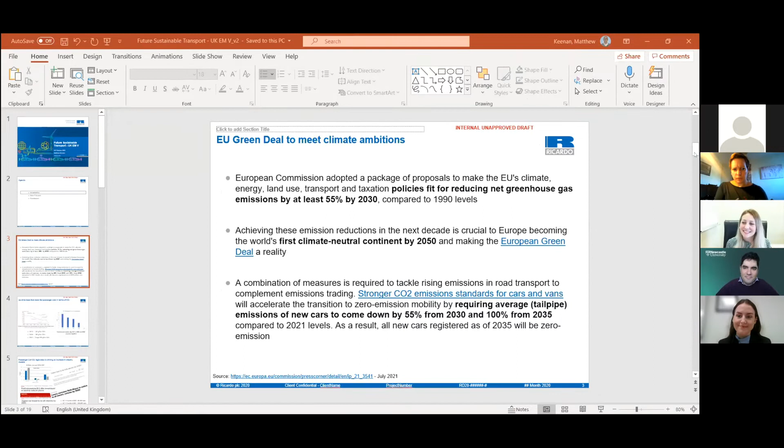So this morning I'll hopefully set the scene for what we at Ricardo think are going to be some of the important challenges in having very good emissions control in our transport sector. The transport sector has been changing significantly over the previous few years, and we really try to see where the main catalytic challenges may lie in terms of different tailpipe species that need controlling, the temperature these systems will need to operate at, and the impact of real world conditions on how emissions control is still necessary, ensuring we have very low tailpipe emissions from our transport sector.

So we've got 3 sections this morning. We'll have an introduction to look at some of the drivers - the European drivers impacting the automotive industry. We'll look at Euro 7 impacts. Later this year the Commission should be publishing their first draft of Euro 7, so it'll be interesting to see how that fits. And finally we'll have some summaries on what we think the future transport system may look like.

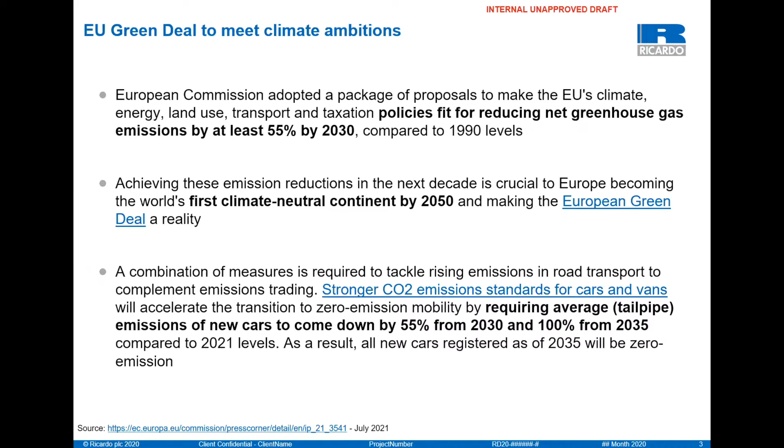The next target we have is this year - meeting 95 grams per kilometre CO2 fleet average for passenger cars. Last year we were at 108 grams per kilometre CO2, so we've got a step change from 108 down to 95 - a reduction of 13 grams per kilometre fleet average from last year to where we need to be by the end of this year. It's quite a steep trajectory from 2019, where unfortunately tailpipe CO2 emissions average had increased in previous years, but over the last year or so we've had a significant step change in these tailpipe CO2 emissions.

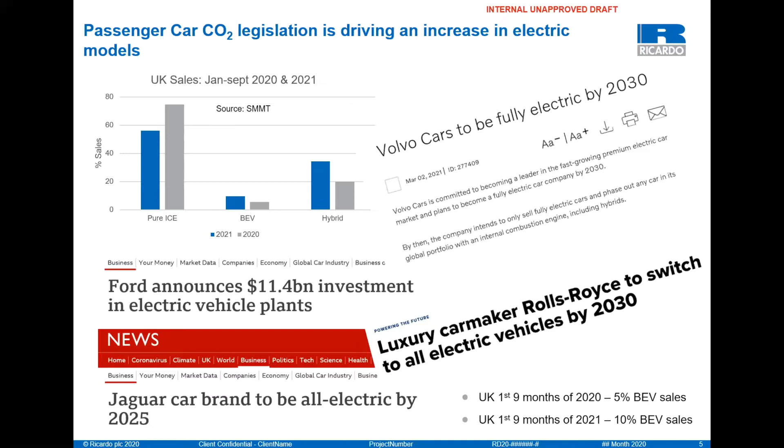Similarly for trucks, there's significant CO2 legislation in place. If we just look at the large Class 8 trucks, they are targeted with a 15% reduction in CO2 at 2025, dropping to a 30% reduction in CO2 at 2030, all relative to the CO2 emissions at 2020. So you really need to have a good understanding of where you are now and how your trucks are performing in terms of CO2 and fuel economy, and then have your plan of how you go from where you are today all the way down towards 2030, with CO2 reduction targets following for different classes of trucks. So the whole arena is now significantly focusing on reducing CO2 from the tailpipe of the vehicles.

Just to complement those CO2 requirements, we are starting to see some interesting technologies applying to the large application sector. This application is being brought into service because of local legislation. Ultra-low emission zones occurring around Europe and around the globe are in some cases superseding what the Commission is looking at in terms of its global CO2 and global emissions legislation.

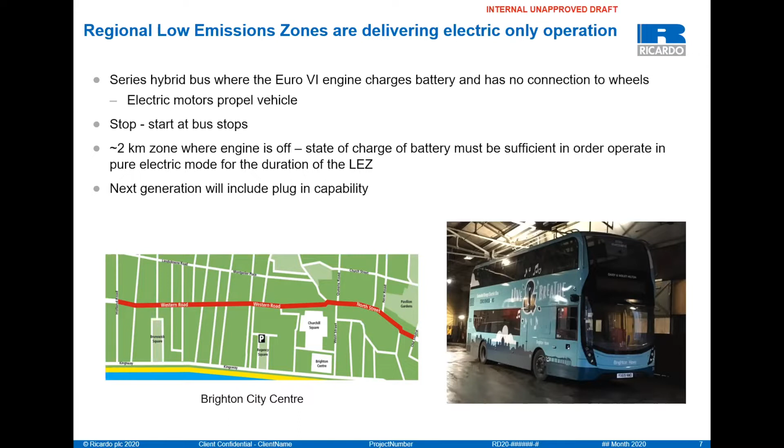Okay, so Euro 7 and beyond. What does this mean for our passenger car technology? What does it mean for our truck technology? And what does it mean for some of our large engine technologies? We'll have a quick walk through how we think this will impact technology.

So Euro 7, not before 2025 from the Commission's view. This is going to be the last emissions legislation, and therefore it needs to incorporate current fuels and future fuels. So this will cross-cut all the different fuels we have now and any new fuels in the future - those new fuels could be hydrogen, they could be ammonia. We'll come on to those a bit later.

Very differently to how we do emissions testing at the moment - where you normally drive a specific cycle with a fixed length and control emissions in that fixed length - this is changing at Euro 7 to allow any trip to be a valid trip, and you have to control your emissions in any trip.

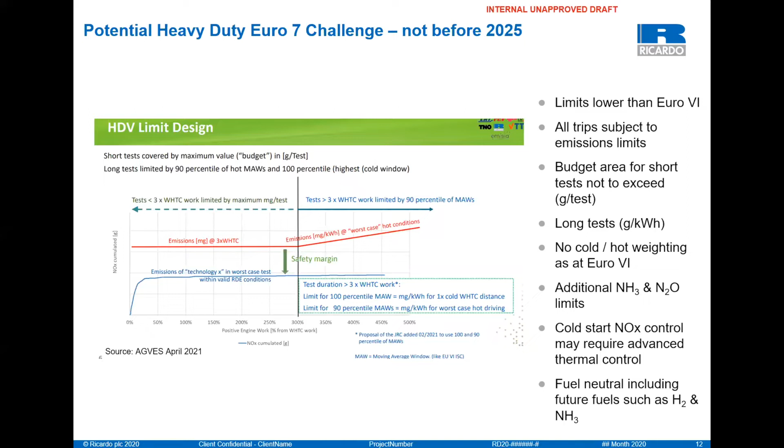This allows us for short tests, long tests. It removes previous weighting of hot and cold testing. So every driving operation needs to be valid, and the emissions in that cycle need to be well controlled. We're going to have additional pollutants to control, ammonia, N2O. And also, as I mentioned before, we will need to be able to meet all these limits and ambient conditions if we're using hydrogen as fuel or if we're using ammonia as a fuel. I think that's quite interesting, the way the heavy duty arena is looking more seriously at hydrogen and ammonia.

So if we look at what a heavy duty after treatment system might look like towards Euro 7, this is 2025 and beyond. Because of the cold start challenge, because every trip is a valid trip where you need to control your emissions, we are probably going to have a very close coupled SCR system. Traditionally in a truck, the after treatment system is one or two meters away, in a box in a relatively cold position on the chassis of the vehicle. We're going to have to put a small SCR system very close to the turbocharger to use the heat from the engine to control the emissions.

So we get this really complicated after treatment system where you have a urea injector, an SCR, an ammonia slip catalyst, which is quite small, so it's only really effective under limited cold start, low load operation. Then we have our more traditional DOC, DPF, SCR, ammonia slip catalyst. So it becomes a really complicated system. But what this allows us is to reach very low tailpipe emissions. For this type of system, for a low load cycle or delivery cycle, which are challenging cycles, we're targeting less than 70 milligrams per kilowatt hour for NOx emissions.

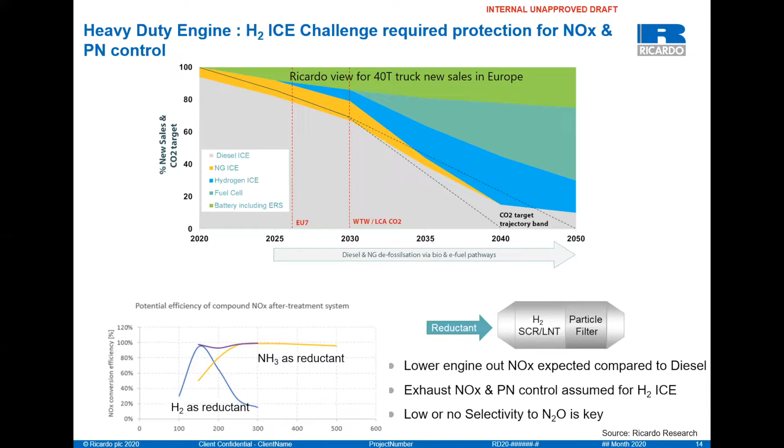Okay, I'm slowly running out of time, so let me just jump to the ammonia engine.

So the ammonia engine is being seriously investigated for marine applications. Studies are starting, demonstrator programs are starting as well. We have an international distribution of ammonia, so we know how to transport it - it's a liquid, we handle it regularly. We've got large production of ammonia globally for fertilizers, so there's potential here to use ammonia as a fuel in some of these very large engines.

Challenges though: you burn ammonia, you will make NOx, you will have ammonia slip, and you can have N2O being formed.

Therefore, you need an SCR catalyst to control the NOx. However, we understand that some SCR catalysts at the moment can make N2O. So you could get into a situation where after your SCR catalyst, you have low NOx, potentially high ammonia, and some N2O.

So we're going to need an ammonia slip catalyst to control the ammonia. We also know that ammonia slip catalysts can form N2O as well. So you could end up having an ammonia engine, which is a carbon-free fuel, but having quite a big greenhouse gas footprint because of the N2O that's being formed.

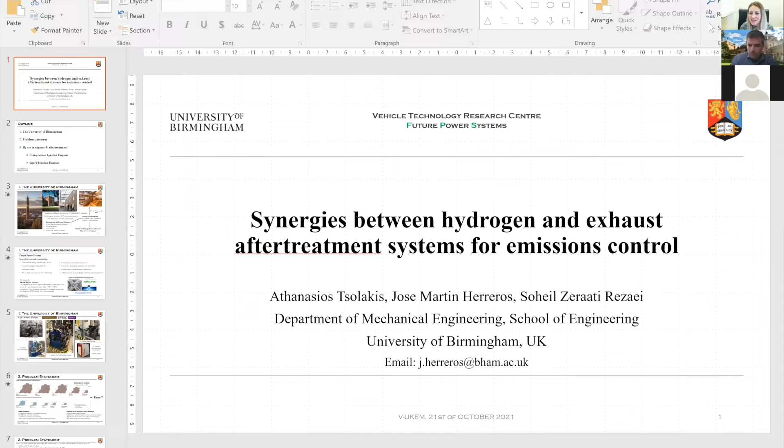The talk today is about synergies between hydrogen and exhaust after treatment system for emission control. We're going to present some of the work that we have been doing in the last 7-8 years at the Future Power System Group with my colleagues Professor Thanos Tsolakis, Dr. Soheil Zeraati Rezaei, and myself, Martin Herreros.

We have divided the presentation into 3 main sections. The first one, very briefly about ourselves, University of Birmingham, and our group. We will also define briefly the problem statement, the challenges we are having with emissions, and what solutions we could have to tackle those challenges. Then, taking the major part of the time, we will present some case studies on the interaction between hydrogen in engines and hydrogen with the after treatment system, mainly applied to compression ignition engines, DOC and hydrocarbon SCR, as well as to spark ignition engines.

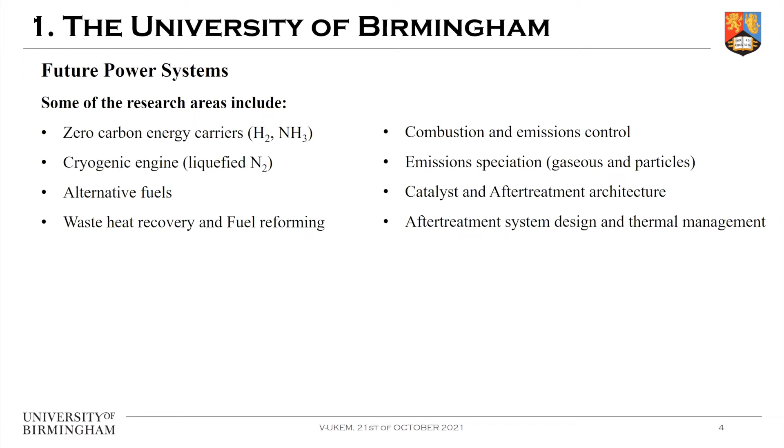One example of our contribution was the Horizon 2020 project titled Partial PGM, involving multiple partners from Europe and the United States, with one of the leading partners being Johnson Matthey.

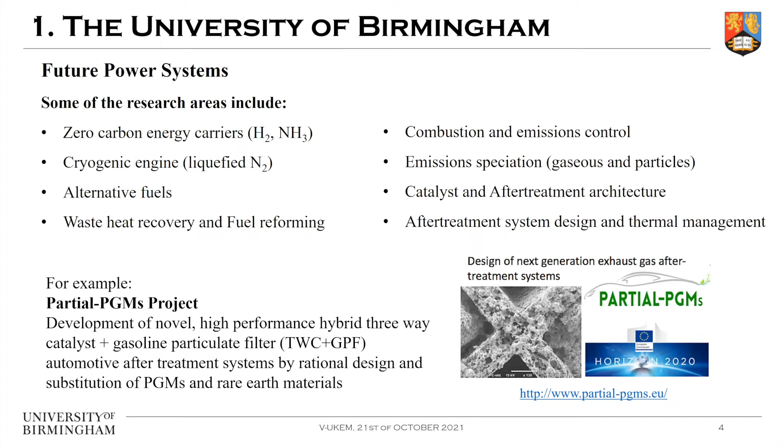In terms of the problem statement, without repeating much of what Matthew already explained, I have included a picture showing how European regulation has evolved from Euro 3 to Euro 6D - on top for diesel vehicles, and on the bottom for gasoline cars. For each regulation we can see 2 clouds: the outer cloud is the real on-road measured values, and the inner is the regulated value. This was very famous some years ago - the discrepancy between the regulated value and the real values, particularly for diesel engines. Interestingly, Euro 6B and Euro 6D regulations have made it possible to reduce the real NOx value, getting closer to the regulated value.

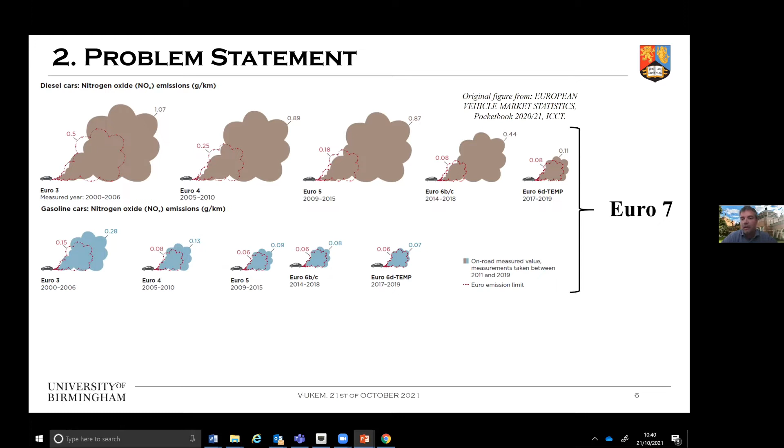So I have just identified here some of the examples of the challenges that industry and ourselves have been facing in terms of diesel, for example, and we still are facing there, how to improve cold start, how to improve transient emissions or emission at high load.

In terms of the after treatment system, if we need any reductants to increase the effectiveness of the treatment system, if we can generate the reductant ourselves on board. And when we have, for example, a particle filter and we need to regenerate it, trying to improve how efficiently we regenerate the particle filter.

And in the case of gasoline engine, very typical example, challenges to improve simultaneously fuel economy as well as to reduce emissions. For example, we can try to run the engine in lean operation to improve fuel economy, but then at the same time we will be troubled the three-way catalyst to perform well because we will have excess of oxygen in the exhaust, and then we might need other type of catalyst also here.

So far, we have been working with those challenges to try to fulfill those emission regulations, and now, if other type of pollutants are regulated, we will still need to keep working on these challenges, but targeting perhaps now particles emission, small particles emission between 10 to 20 nanometers, N2O, and ammonia, and how the measures that we have made before are affecting now to also ammonia and N2O.

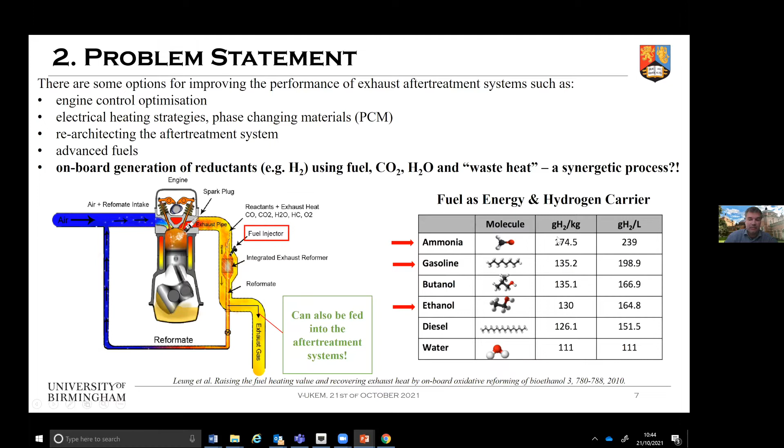And then going a bit more in depth on the case study that we have investigated. The first one, I have prepared a schematic here, and we will have in this case a diesel engine, and then we are trying to investigate what is the effect of hydrogen being injected upstream on, in this case, a diesel oxidation catalyst. Then we have done the test with a small catalyst inside a reactor, inside a furnace, because this allows us to study independently residence times through the catalyst, temperature, the catalyst, and species concentration after the catalyst independently of the engine operation.

Then by doing that, we observe how, when we did the catalyst light off without hydrogen, the catalyst started to be active around 130 degrees. And then when we were injecting this upstream hydrogen, we were able to make the catalyst active at lower temperatures.

Something interesting here was that small hydrogen additions were able to enhance catalyst activity, but increasing the hydrogen concentration, the advantages were not so great. So it seems that we have some limitation here.

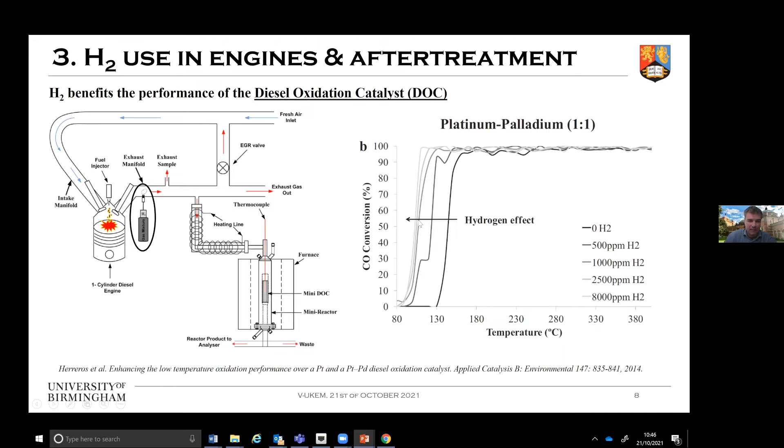Similar type of setup using this mini catalyst, but in this case we are using synthetic hydrogen from compressed hydrogen from a bottle. Let's try to understand how this synthetic hydrogen will affect the performance of a hydrocarbon SCR. Hydrocarbon SCR is a type of SCR that, instead of using ammonia, uses hydrocarbons to reduce NOx. We also have the option to use hydrogen SCR, which uses hydrogen as a reductant. So for this particular case, hydrocarbon SCR also needs hydrocarbon.

What we were doing here is using an engine that allows us to use post-injection, injecting our fuel very late in the expansion stroke of the engine. So the hydrocarbons were unburned, only partially burned, and then made available coming here for our SCR. So our SCR was fed by NOx, hydrogen, and hydrocarbon.

Originally we saw that at this temperature range, around 180, 190 degrees, the catalyst activity was not very high when it was fed only by hydrocarbon. However, when we start to inject hydrogen, our catalyst activity increased. And of course we could have played here trying to optimize the process between how much hydrogen we can add and what the hydrocarbon-to-NOx ratio should be to make the catalyst as efficient as possible.

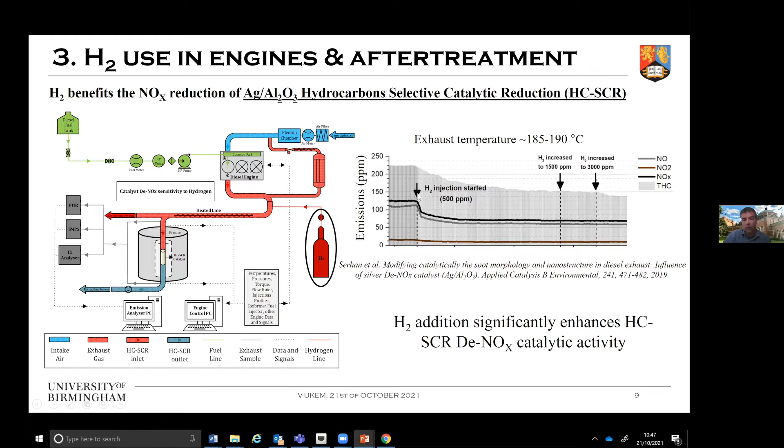In these lines, a very similar test that we also did, but in this case, instead of using the hydrocarbon remaining from the combustion chamber, we were trying to understand the impact of other types of hydrocarbons. So we were injecting, pre-hydrocarbon SCR, butanol, GTL, and a mixture of GTL, gas-to-liquid synthetic fuel, with butanol, simultaneously with hydrogen.

We observed that by injecting butanol and hydrogen, we were able to obtain very high conversion efficiency, close to 90%, in a relatively wide temperature range. This means that a very active fuel can help hydrogen make our hydrocarbon SCR system more efficient. So the fuel is also playing a role here.

Again on the topic of hydrocarbon SCR, but in this case not so much focused on the hydrocarbon side, and not injecting hydrogen from a bottle. Now what we were doing was injecting ammonia, then catalytically cracking, decomposing this ammonia into hydrogen and nitrogen. Depending on the conditions, we had different proportions between hydrogen and unconverted ammonia. Then what we did was recirculate this hydrogen and ammonia back to our engine.

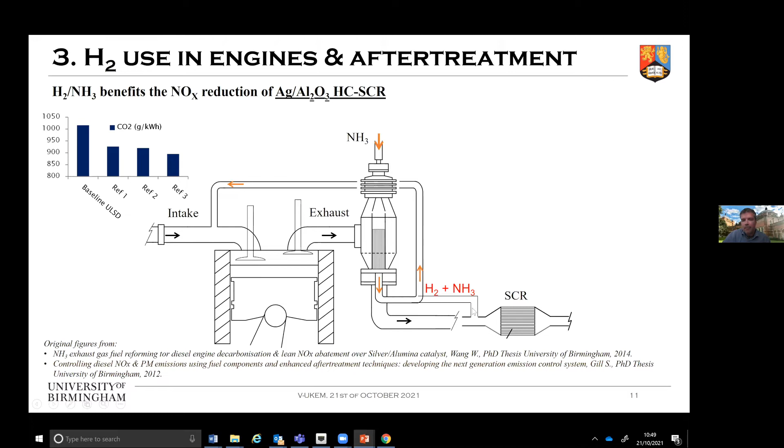But also what we did was take this hydrogen and ammonia mixture pre-SCR and try to see how effective it would be for our SCR catalyst. What we obtained was that from a very low initial conversion efficiency, at a temperature range around 200 to 220 degrees, the conversion efficiency without the hydrogen and ammonia mixture was around 15 to 20%. Then by injecting hydrogen and ammonia, we were able to increase the effectiveness up to 60 to 65%.

By playing a little bit with the engine, using external recirculation, we were able to increase the NO2-to-NOx ratio pre-SCR, and increase the conversion efficiency of our SCR to close to 90%. So this was everything about compression ignition engine.

Now let's move to the case of a spark ignition engine. I have to say that for the case of a spark ignition engine, our research has not been so much focused on the effect of hydrogen after-treatment system, but more on how to produce this hydrogen.

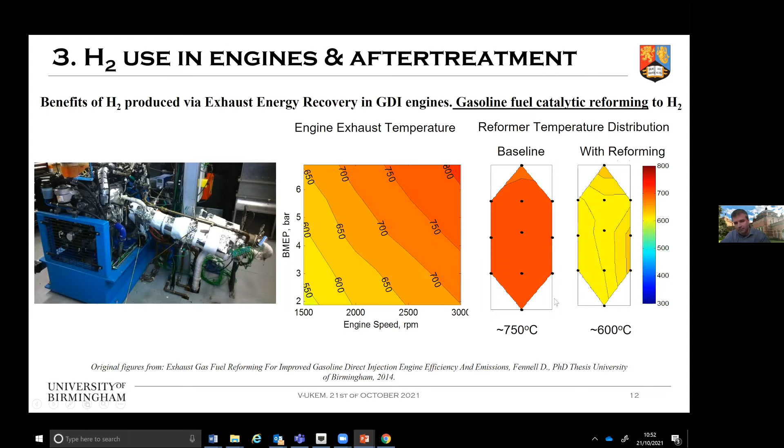This means that we are able to use or recover some waste heat from our engine, which means that we are able to drive the endothermic reaction to produce hydrogen. When we did, we recirculated this hydrogen and CO back to the engine.

We were able to improve the indicated efficiency of the engine, depending on engine condition, up to 9%. We were also able to reduce NOx emissions. These numbers represent the reduction: 0.06 means we reduced 94% of NOx emissions, 0.12 means we reduced 88%, and we also obtained reductions in particle emission levels.

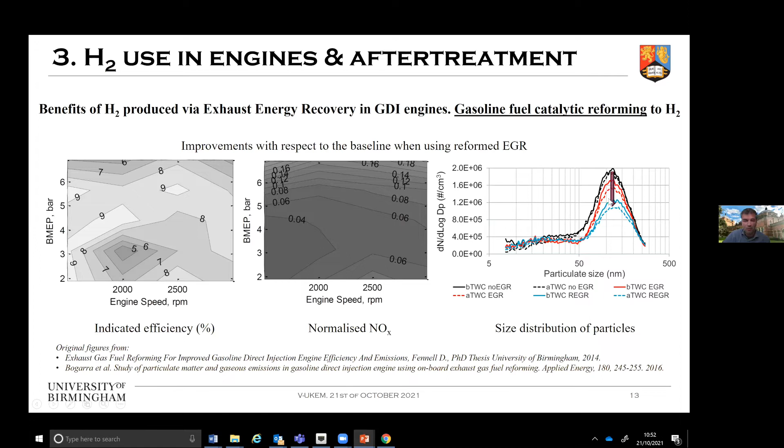To finish today, again on the topic of spark ignition engines, we did some preliminary work on the case of ammonia. We will study how the dissociation or cracking process of ammonia works by using the exhaust of a gasoline direct injection engine.

What we obtained is that we were able to recover some waste heat. Efficiency here higher than 100%, in the way we define it, means we are able to recover waste heat from the exhaust. Depending on temperature, we were able to convert the ammonia to hydrogen more or less successfully. When we increase temperature, we were able to increase the conversion to hydrogen.

By doing some further calculations, we were able to predict how much energy we could recover from the engine and what the impact would be in terms of CO2. This still has to be demonstrated by testing in a full-size cracker to see if the predictions are correct or not.

So what are we working on now? We are trying to understand the effects of hydrogen, and perhaps reforming or partial products from ammonia cracking, on the gasoline exhaust after-treatment system. We are trying to improve the compactness of the exhaust after-treatment system, including hydrogen generation and utilization.

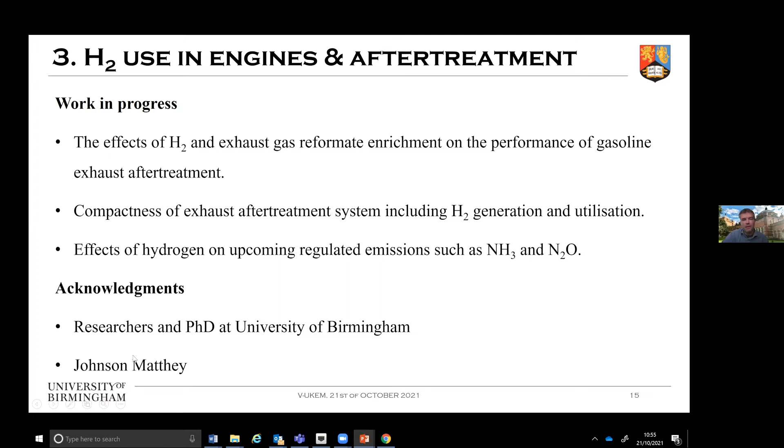This is work that has been done with multiple researchers at the University of Birmingham, as well as thanks to Johnson Matthey for providing the catalyst during the year to do this research. That's the end of the presentation, and I'll be happy to discuss or reply to any questions in the discussion session later.

Thank you, Jose, for the really interesting talk. I'm sure there will be plenty of questions in the discussion later.

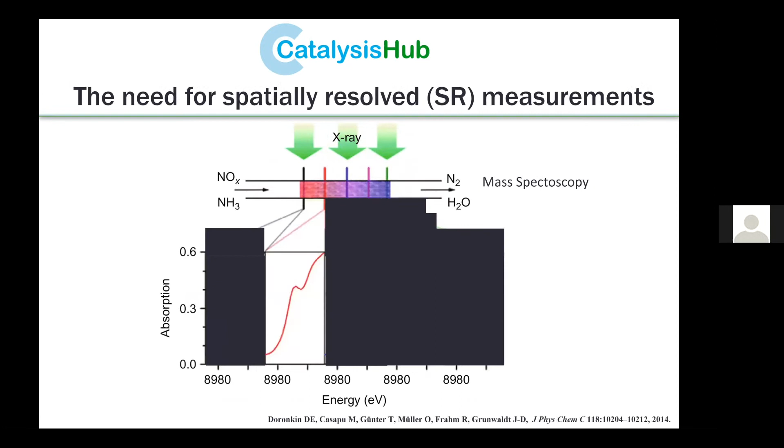For example, you observe that the center has a completely different behavior than if you look at the start of the catalyst or at the end of the catalyst. This may have a strong effect on the structure-activity relationship we are trying to understand, and how the catalysts behave, because there may be a temperature gradient as well as a gas concentration gradient across the bed, which makes the analysis not as straightforward.

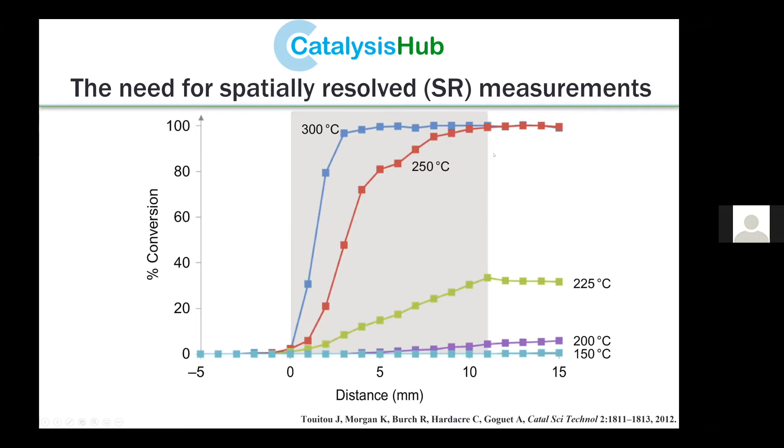For example, for CO oxidation, although 250 and 300 degrees look exactly the same to a normal user looking just at the end pipe measurement, if you look at the gas concentration, the conversion, at various positions, you see that at 300 degrees you get 100% conversion already at 3 millimeters in, whereas at 250 degrees you only get it toward the end, which would make the analysis fallacious.

For this reason, the Hub has developed a system called SPACI-FB. This technique allows direct measurement of gas composition at various points across the catalyst bed, and combining it with spectroscopic techniques, such as XAFS, allows us to have a direct correlation between structure and activity at various points across the bed.

This technique uses a capillary which has been bored through lasers, and this capillary is embedded through the catalyst bed. Rather than moving the capillary, because it's very fragile, we move the catalyst bed, and the capillary is connected to a mass spectrometer at the end, where the mass spectrometry data are collected.

We apply this technique to ammonia oxidation. Why ammonia oxidation? Well, ammonia is a pollutant and a greenhouse gas, and is often used in the selective catalytic reduction of NOx. However, unreacted ammonia from this reaction may spill and pollute the environment. Therefore, a way to remove it is to apply selective catalytic oxidation of this ammonia.

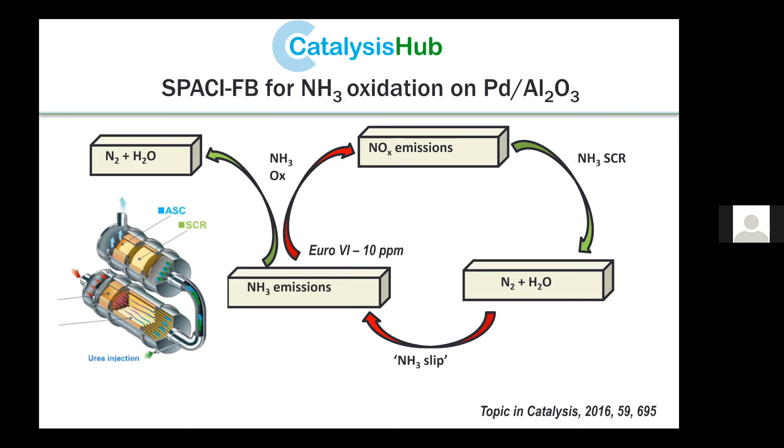So far, palladium on alumina are shown to be the most favorable in terms of selectivity and activity performance. It was found in a previous paper that under reaction conditions, palladium nitride is formed and is thought to be the selective phase. This palladium nitride phase is a hetero atom insertion on the palladium lattice, similar to palladium hydride or palladium carbide, and it was the first time this was found during this reaction. However, spatially resolved measurement will provide information about what the true active phase for the system is.

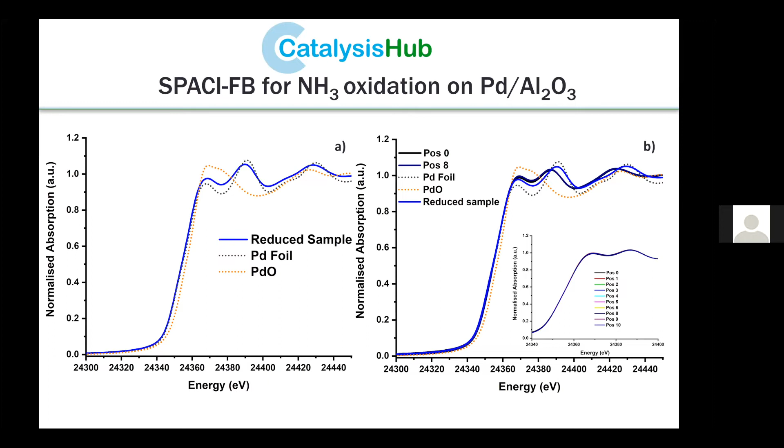As we increase the temperature, to enhance the information obtainable from the XANES, we applied multivariate curve resolution, which allows us to obtain the discrete components of the spectra. The MCR method is particularly powerful in separating and identifying the evolving species within a large data set.

We were able to find three spectral components to the XANES spectrum: one which can be ascertained to palladium oxide, one to palladium metal, and the other to palladium nitride. When applying this analysis to the XANES data shown before, it's clear that palladium nitride is the majority phase, though it's possible to identify minor amounts of both palladium oxide and palladium metal. This proportion is consistent across the bed.

However, as we increase the temperature to 300 degrees, which is prior to full conversion of ammonia, there's a clear spatial variance in the palladium speciation across the bed, as evident by both the XANES MCR and the EXAFS shown in A and B, along with the spatial variation in the conversion of ammonia, shown in C.

From 3 millimeters onward, it's possible to see the consistent palladium-oxygen coordination number indicative of partial oxidation, after the bulk nitride is disrupted, although the MCR shows a consistent amount of palladium nitride still present in the system.

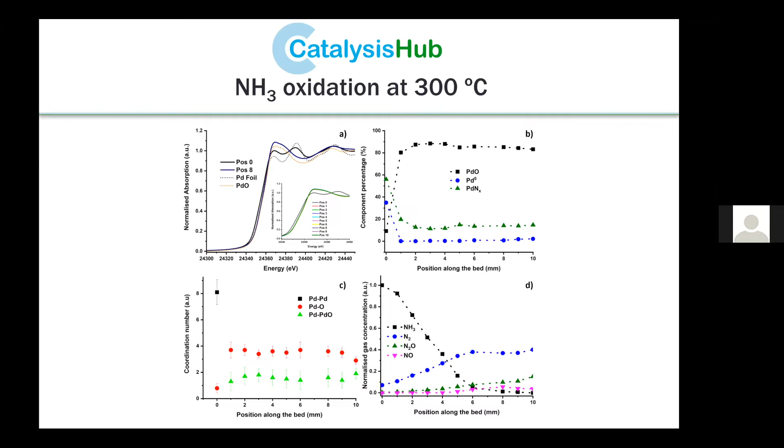So it is clear that there is a correlation between the amount of palladium nitride and the amount of nitrogen produced, and the selectivity toward nitrogen, which is further exemplified when we increase the temperature to 400 degrees. Palladium nitride has pretty much disappeared at this temperature, and only palladium oxide remains as a species, and this species is completely unselective toward nitrogen, as N2O and NO both appear as we increase the temperature.

However, this finding poses an important question: why does the level of NO rise and fall across the length of the catalyst bed? Well, there could be another set of reactions taking place once the palladium nitride phase is removed, a reaction where NO and ammonia combine to produce N2O and water, which is basically an SCR-like behavior.

This reaction has already been studied on palladium nanoparticles using hydrogen and methane, as previously shown by the previous talk.

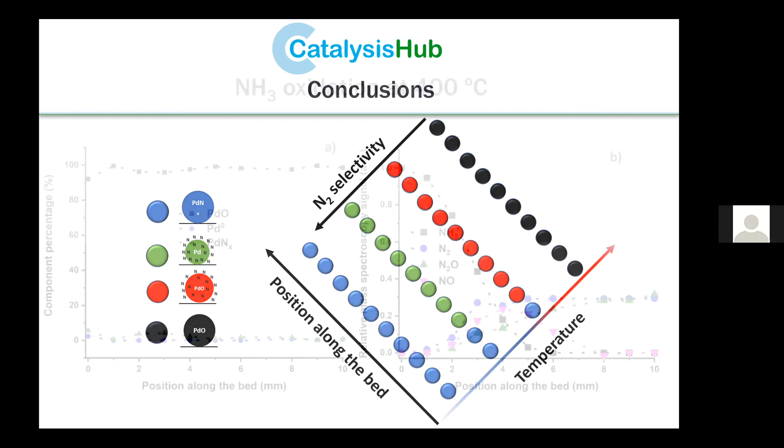We suggest that this change of phase, which happens after position 4, where you can see palladium nitride completely disappear—although you still have a small amount—caused the complete loss of selectivity of the system.

In general, we can see that as we change position across the bed, we have a much wider variance. In particular, during the temperature series for the inlet of the reactor, the palladium speciation is predominantly palladium nitride. However, as the reaction progresses toward the outlet, the bulk interstitial nitrogen becomes mobile.

The MCR analysis identifies a nitride phase present. Even though EXAFS indicates it is absent from the bulk of the particle, we suggest the presence of a surface nitride structure. And while nitrogen is still present, there is still appreciable selectivity toward nitrogen.

As the particle becomes more oxidized, there is a change of selectivity toward NOx products. And at 400 degrees in particular, there is a suggestion that not only ammonia selective catalytic oxidation is happening, but

Okay, great. Well, thank you very much for the invitation to talk. It's always nice to talk at different meetings and see a whole bunch of different faces. Unfortunately, I can only see two or three. But also very nice to see Nancy in her new environment. We are missing her and her coffee, I have to say, over here in Belfast.

So I'm going to talk about porous liquids, and I'm really delighted when people say, oh, that sounds weird and a bit intriguing, because it's something that's very counterintuitive. But what I'm going to try and get across to you is I think this is a very powerful new concept. Let me try and paint a picture.

This came from a chance meeting with a chemical engineer you may know, David Rooney, in a corridor. He knew that we worked on porous solids, MOFs and the like, and he said something really striking: these porous solids are fantastically useful, they have high selectivity for different guests, but the problem is, from an engineering point of view, you can't pump them through pipes. That observation started a conversation - how do you do that then? Do you take these solids and mix them up into a slurry, and could you pump that through pipes, and would that actually work?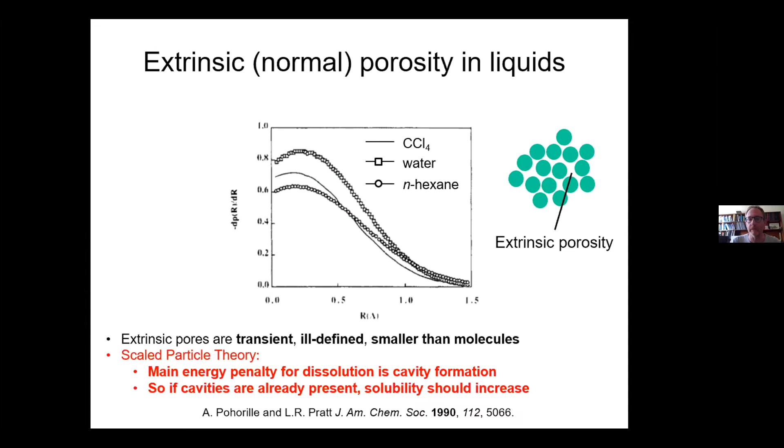So there are different ways in which you can do this. There are the clever and difficult ways - we use a combination of organic and inorganic structures. But you could imagine, in a normal liquid, you've got spaces between the molecules, very difficult to control. If we want permanent cavities that are well defined, one way to do that is to build spaces inside your molecules. That means you're into quite large hosts - organic structures that have a space inside.

Now, we call those Type 1. That's hard to do. Type 2 is a bit easier, where you say, okay, it doesn't have to be only composed of these host structures with a space inside. You could have them as a solution, as long as your solvent molecule is too big to fit inside here - that's the way you keep the empty space.

We made type 2 ones, and I'll give you a quick example now, then come onto type 3. So this is a type 2 porous liquid. These structures you may not be familiar with, but let me get the principle across. This is an organic host structure that we made. It's a cage, it's rigid, so even when it's empty this thing just cannot collapse. And there's a space inside it, just there.

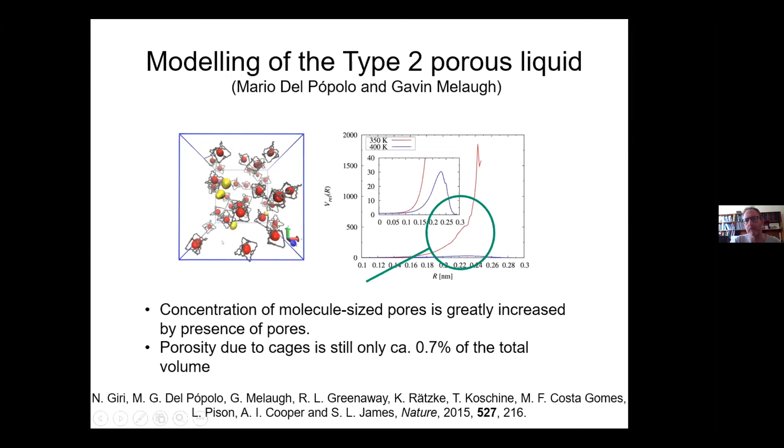So molecular modeling, very important. You can use that to support the idea that there are empty spaces. So here we see these red solid shapes - this is where the empty spaces are in our porous liquid, all inside those cages.

So we get interesting properties here. What are the challenges now? I'm very interested in the fundamentals of this, but also, is there any chance to seriously think about applications? And I think that we can, if we find a simpler way to do it.

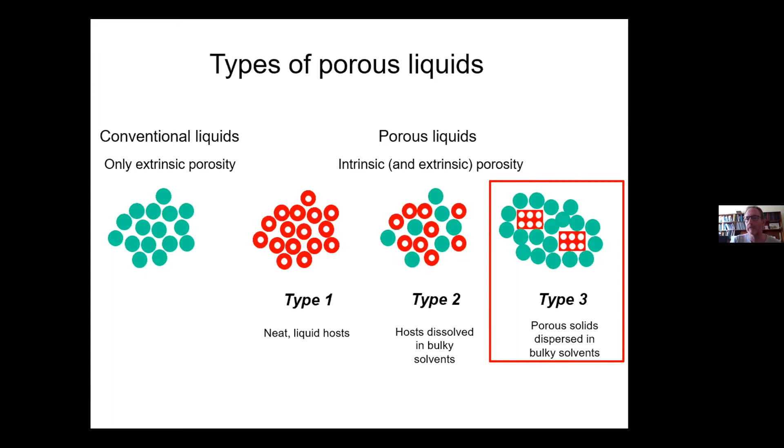We can't rely on all this organic synthesis. If we take a very simple approach and say we're just going to take off the shelf a microporous solid powder - could be a zeolite, could be a MOF - and we're just going to disperse it into a liquid to make a slurry or suspension, as long as the liquid molecules, these green things here, are too big to fit into the pores in our particles, and as long as our particles stay dispersed, then effectively what we've got is a porous liquid. It's going to be a sort of milky thing, not a clear solution, but hopefully it's going to have these interesting gas uptake properties.

So these are what we call type 3 porous liquids, and in some cases it's very simple: porous solid plus a liquid, bearing in mind the liquid has to be bulky so it can't fit inside. Sometimes with additives to help the stability of the dispersion, you get these milky looking phases. Very easy, very economical to prepare. We've made hundreds of these, all sorts of different liquid phases - you can have cheap things like silicone oils, etc. Porous solids can be MOFs or zeolites, and sometimes you have to work on particle size and the rest of it to get it stable, but then you have your porous liquid.

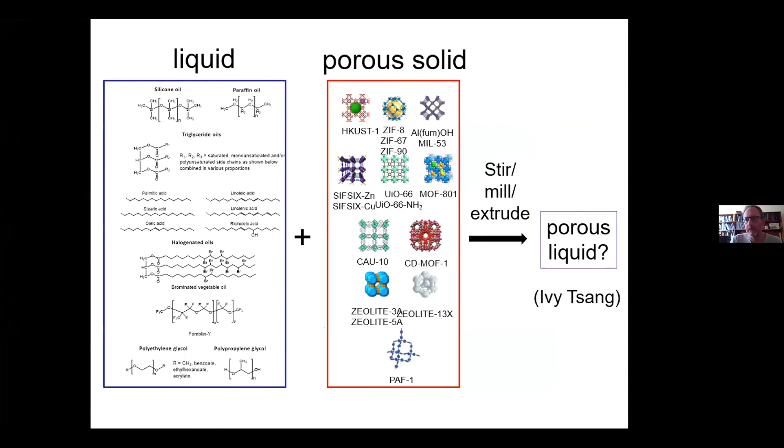So let me talk briefly then about CO2. We talked to Shell a few years ago about this concept of porous liquids, and they said, what about taking CO2 out of natural gas sweetening? And actually, of course, CO2 capture has huge applications. We actually went more for the biogas angle, which is similar, and we chose to compare our porous liquids to physical solvents.

These are polyether solvents that are used for CO2 capture. They're physical solvents - not fantastic at absorbing large amounts of CO2, but they're easy to regenerate, so they have that advantage over amines because they're just physical solvents. So we thought, can we actually just take these solvents that are already used for CO2 capture, add in a porous solid and make a dispersion, and basically boost the CO2 capture of the solvent?

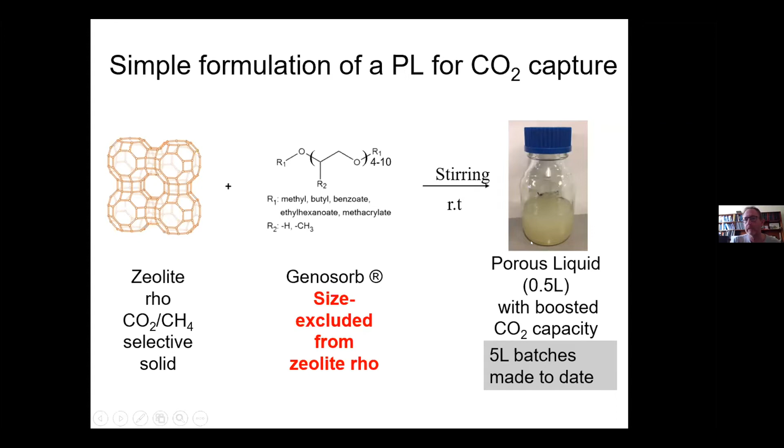So it boils down to something very simple. These are the polyethers already used for CO2 capture, trade name Genosorb or Selexol. This is a zeolite rho, known in the literature to have high CO2 capacity and high selectivity to CO2 over methane. Because the pores are very small, these ethers cannot fit inside. So if we disperse this zeolite into this solvent, we get a milky looking suspension.

It has much higher CO2 capacity than the original liquid does. Showing you some data here. I'm not going to talk about this in too much detail, but essentially we looked at different pressures, different temperatures, imagining a pressure and temperature swing process to deduce what the CO2 capacity was, the working capacity. How much CO2 can you pump in and how much can you get out?

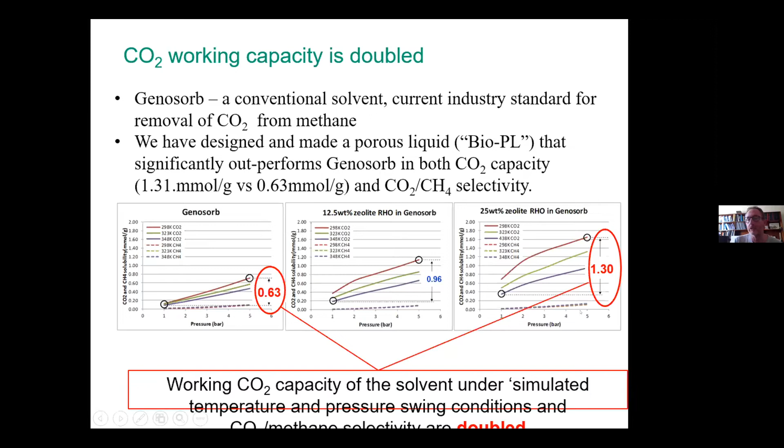For Genosorb, the solvent itself, we came up with 0.63 millimoles of CO2 per gram, and you can see that's roughly doubled in our porous liquid on the right here. So basically it works. Also notice the dotted lines here, these are the methane uptake, and that stays really low. So we've increased the capacity and the selectivity for CO2.

So then going back to David Rooney, with his help, we put together this rig, which is a lab-based rig, a continuous flow rig, and it works on a similar principle to the real large-scale solvent extraction systems for taking out CO2. And it works really, really well.

So here, these are the data from the continuous flow rig after a single pass of the solvent through. This is the feed gas going in, meant to mimic biogas. We have mainly methane, 65%, 35% carbon dioxide. Using Genosorb as your solvent to extract the carbon dioxide, after one pass through the system, the CO2 goes down to 28%. So 35 to 28, that's good, it's working, it's doing its job.

But you see what happens with the porous liquid. Now the CO2 content goes down to 11%. So it's much more effective.

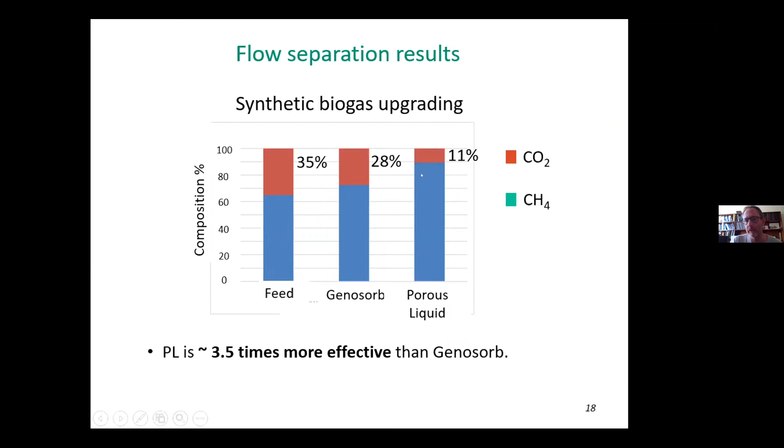We also got a techno-economic analysis done on this by some independent consultants, and they said that if you just change the setup - instead of putting in the industrial solvent, you put in the porous liquid - what difference does that make? They predicted you can get a 23% operational saving for various reasons, different pumping energies, but also you lose less methane in the process because you have a more selective solvent.

So the next step is we're going to on-site trials to see if we can do this with real biogas, and we're looking at other opportunities for CO2 capture as well. We've got some quite exciting things going on there.

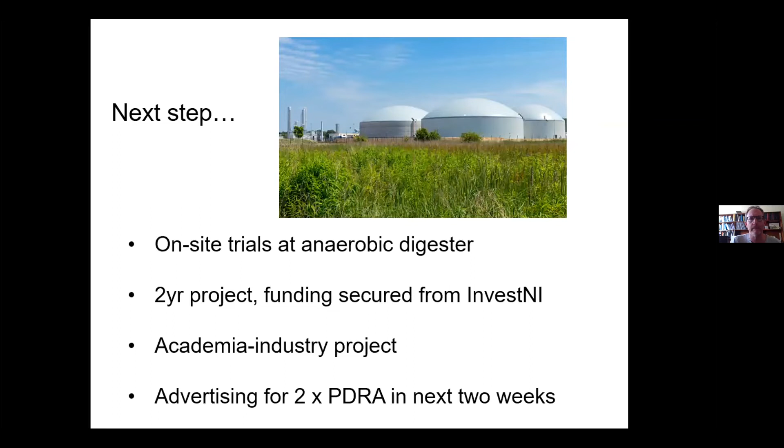So let me just conclude then. Although porous liquids seem like a very counterintuitive thing, it is entirely possible to get porosity into the liquid state. You can do it in clever, intricate ways, or you can just take a very simple approach and disperse porous solids into the right liquid phase. Solubility and selectivity of gases is dramatically enhanced. The type 3 one is very economical to make, and you can basically improve performance of CO2 capture.

So this is more for the porous materials community - we normally think of porous materials as being these inorganic extended structures, solids by their very nature. More recently, in the last 2-3 decades, we've seen hybrid metal organic structures come along, and then purely organic molecular porous materials, but in the solid state. The thing about molecules is that in principle, you can dissolve them or you can melt them, so you can get to the liquid state now. And if you get the design right, you can preserve the porosity into the liquid state and dramatically change the solubility characteristics.

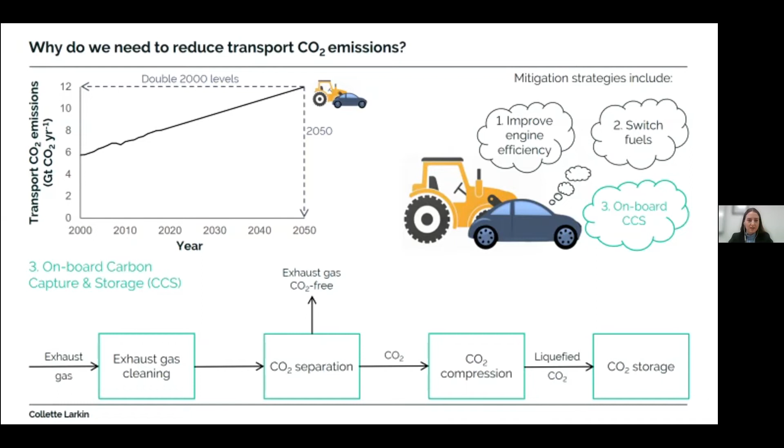So to overcome the size and weight limitations, we need to develop a compact CCS system. Looking at the CO2 capture stage only, one technology that provides a promising solution is the hollow fibre. A hollow fibre is essentially a long, thin tube, which in industry can range from lengths of 1 to 1.6 metres.

What makes a hollow fiber unit special is the high surface area to volume ratios generated from its microstructure. If we look at the cross section of this hollow fiber, we can see it has channels. I've decided to show you a hollow fiber with 4 channels, as this is what I've been using in my research. By modifying the fabrication process, you can produce any number of channels.

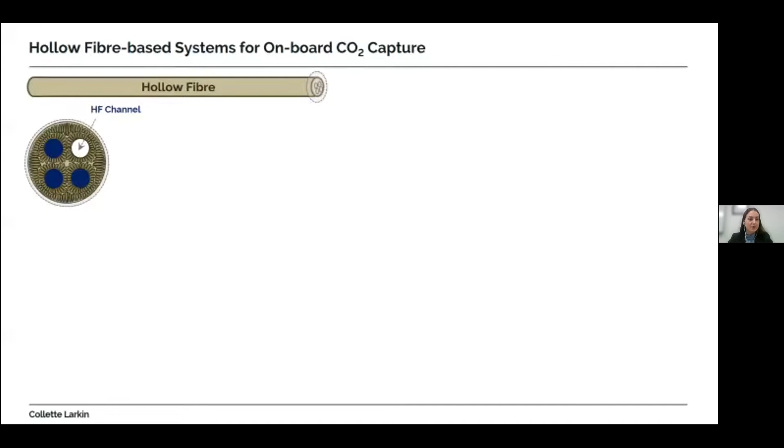Taking a magnification of the cross section, we can see the morphology of the hollow fiber and the sandwich structure it possesses, consisting of a sponge-like region and a finger-like region. The finger-like region generates this high surface area to volume ratio. These finger-shaped pores represent thousands of open, conically shaped microchannels perpendicularly distributed around the empty channels. Since the fingers are open, gas flowing into the hollow fiber channels enters the finger via diffusion with ease, such that pressure drops remain favorably low.

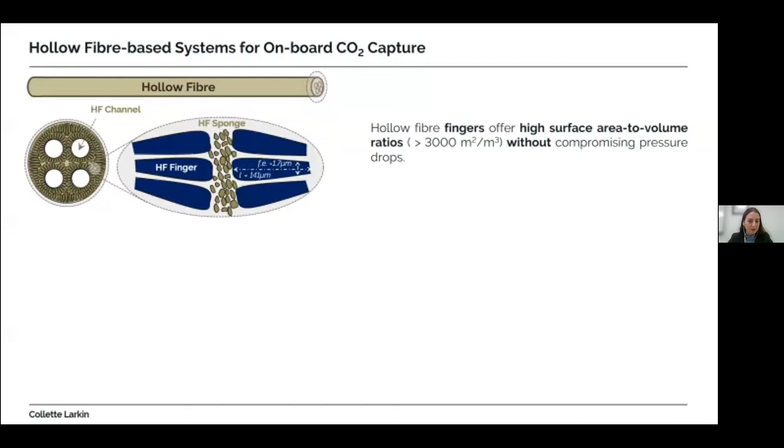To create a capture system, you can take multiple hollow fibers and glue them together to create a module, and this doesn't affect the performance of the individual hollow fiber, so it can make the scaling up of the system very simple and easy.

There are three applications as to how you can use the hollow fiber in order to capture CO2 in the exhaust, which I'll briefly introduce now. The first application uses the hollow fiber as a contactor.

In this instance, the fingers of the hollow fiber provide a gas-liquid interface for mass transfer. The material of the hollow fiber can be inert, or it can be coated to enhance the CO2 separation process. An issue they often find is with water, causing the pores to no longer be as open.

The second application is to construct the hollow fiber with a permselective membrane that is selective to CO2, such that only CO2 passes through the walls of the hollow fiber. This is using the hollow fiber as a membrane, which is quite common as well.

The third application is to use the hollow fiber as an inert support and deposit an adsorbent material into the fingers of the hollow fiber, forming a hollow fiber adsorption unit. Here, the CO2 diffuses into the fingers where it contacts the adsorbent and is captured. The work I will present today is based upon using this application, and I will discuss that now in more detail.

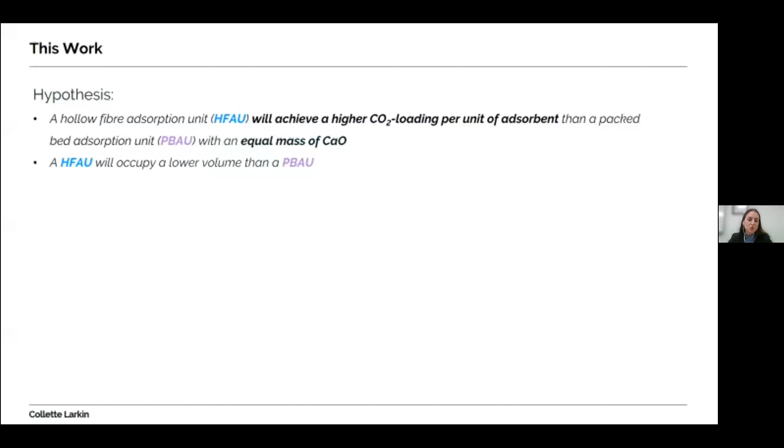The agenda for the remainder of the presentation will be for me to discuss the fabrication and characterization of the adsorption units, with a particular focus on the hollow fiber adsorption unit, the reaction conditions that were used, and the results and conclusions of the work.

These photos are a snapshot of the hollow fiber support fabrication process used to create ceramic hollow fibers and show what the hollow fibers look like. The hollow fiber support for the hollow fiber adsorption unit was fabricated by phase inversion, followed by sintering at high temperatures.

The phase inversion process takes place during the spinning stage of the hollow fibers and produces a hollow fiber precursor, which can be seen leaving the spinneret. The hollow fiber precursor is then placed into an oven at temperatures of around 1400 degrees Celsius to complete the sintering process, giving the final ceramic hollow fiber support.

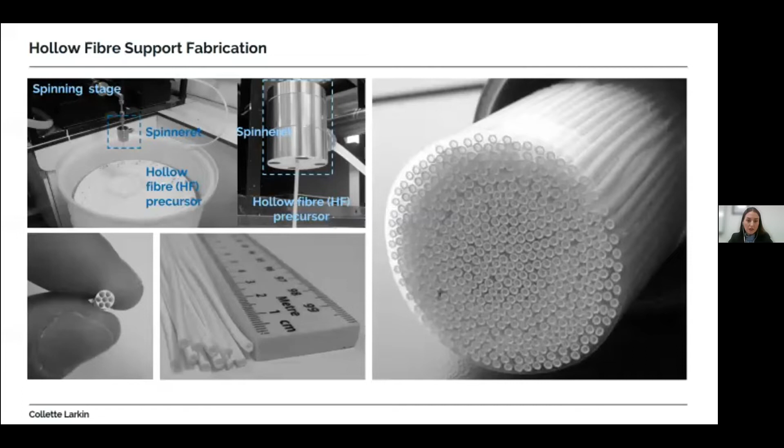For our work, we used alumina hollow fibers. The remaining photos are of a multi-channel hollow fiber and a single-channel hollow fiber, included for your information, so you can see the different variations hollow fibers can look like.

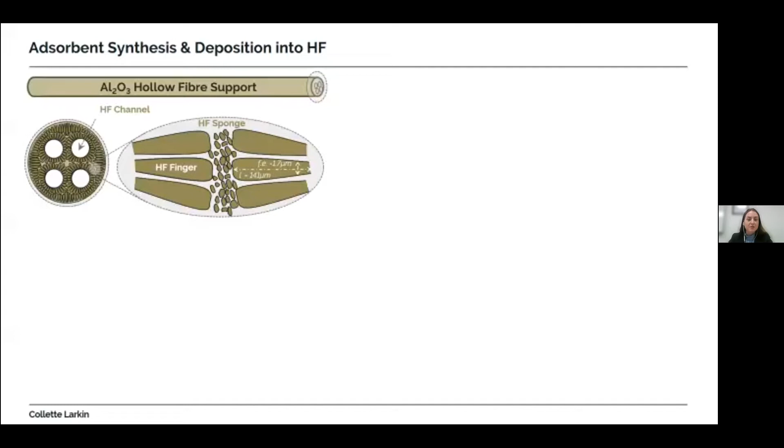Once we have our alumina hollow fiber supports, we can deposit the adsorbent material inside the fingers. In this work, we selected calcium oxide as the adsorbent material, since it is a cheap and widely researched CO2 capture adsorbent. The Sol-Gel technique was employed to deposit the calcium oxide.

The first step of the method was to make the precursor solution, which was pipetted into the hollow fiber. The outside was covered using Teflon tape to ensure only the inside of the hollow fiber was impregnated. The second step was to let the precursor solution dry in an air atmosphere overnight at 65 degrees.

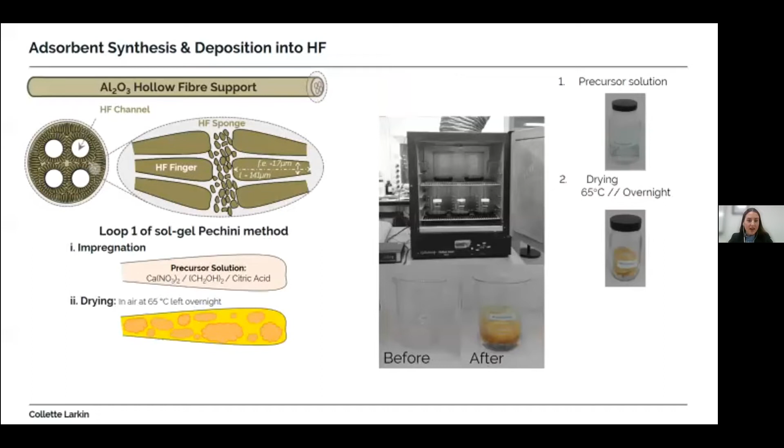This produced an orange cake. Thirdly, the cake was calcined in an air atmosphere at 900 degrees Celsius for 5 hours. This produced the characteristically white calcium oxide solid and formed the hollow fiber adsorption unit.

The same method was used to create the pellets for the packed bed adsorption unit, except that was all undertaken inside a beaker. But how do we know if one impregnation loop is the most optimum?

And to get a better understanding of how increasing the number of impregnation loops physically affects the hollow fibre adsorption unit, SEM photos and EDX surface mapping images of the hollow fibre adsorption units after impregnation were obtained at magnifications of 25, 100, and 5,000 of the cross section of the hollow fibre adsorption units.

From the photos, it can be seen that the neat, open, porous structure becomes progressively filled as the number of impregnation loops are increased. Taking an EDX analysis of the hollow fibre adsorption units at a magnification of 100, it can be seen

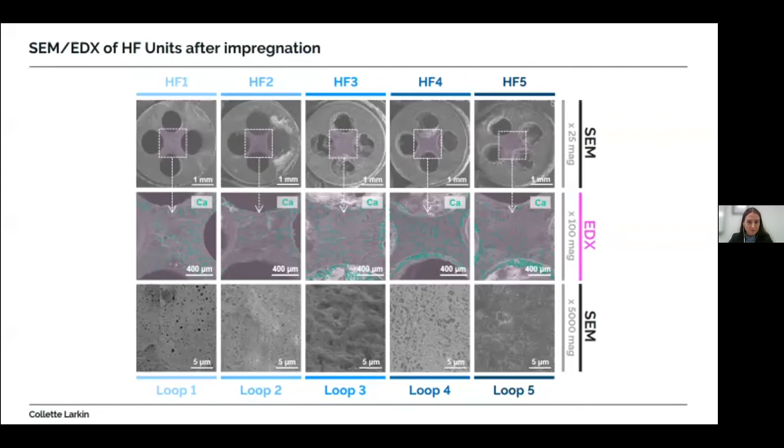that the calcium atoms are homogeneously distributed and increase in frequency as the number of impregnation loops increased. Then another characterization technique in the form of mercury intrusion porosimetry analysis was conducted, as it shows the empty volume present within the fingers and hence the impact the number of impregnation loops has on the pore size distribution within each of the hollow fibre adsorption units.

They show that as the number of impregnation loops increased, the peak pore size diameter and intensity of the pore size distributions for the finger-like region decreased. And if we pair these results with the SEM and EDX images shown previously, we have identified 3 possible deposition scenarios that the 5 hollow fibre adsorption units can be separated into.

So after 2 impregnation loops, the pore size distributions are approximately identical to that of the after 1 impregnation loop, suggesting that the calcium oxide deposited didn't fill the fingers nor reduce the opening to the fingers. Therefore, we propose that the hollow fibre adsorption unit 1 and 2 exhibited the particle deposition scenario.

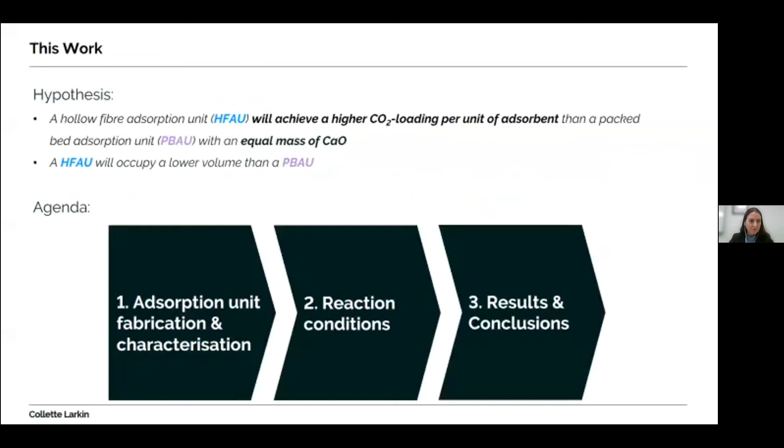When analysing the performance of the adsorption units, it is important to define a criteria to compare the results against. In the case of CO2 capture systems, the capacity of the unit is important as this represents how much CO2 can be captured by the system.

Looking at the capacity per unit length obtained for each of the hollow fibre adsorption units at the 5th adsorption cycle, you can see that the hollow fibre adsorption unit that obtained the highest capacity per unit length was hollow fibre adsorption unit 3. This behaviour can be explained by the thin coating of calcium oxide that was deposited inside the fingers of the hollow fibre adsorption unit, which maximised the surface area offered by the alumina hollow fibre support.

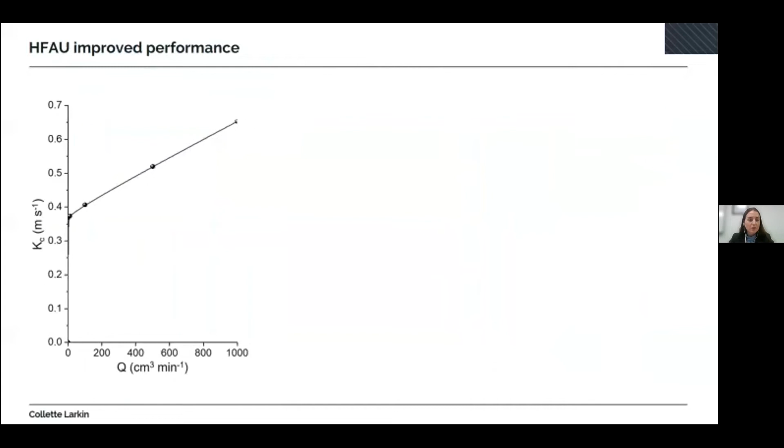Now, if we look at the internal diffusion limitations, the internal diffusion of a gas into a pore can be described by the effective diffusion, Deff, which is related to the bulk diffusion coefficient D, porosity, tortuosity, and constriction factor of the pore bodies. So for the pellets of a packed bed adsorption unit, the internal diffusion of CO2 is limited by a complex network of tortuous interconnecting pathways of pore bodies with varying cross-sectional areas, giving an effective diffusion coefficient that is less than the bulk diffusion coefficient.

However, in a hollow fibre adsorption unit, the CO2 flowed through the empty channel before diffusing into the open microchannels of the finger-like region. As shown by this snapshot of a velocity profile for the flow of CO2 inside the fingers, we can see that the CO2 enters the fingers by diffusion only. Thus, for the hollow fibre adsorption unit, the internal diffusion is governed by the opening of the fingers, which possess a porosity, tortuosity, and constriction factor equal to 1. Therefore, for a hollow fibre adsorption unit, the bulk diffusion coefficient is approximately equal to the effective diffusion coefficient.

Looking at residence time distribution, deviations from the ideal flow patterns, such as stagnant regions, typically arise in packed bed systems and cause the performance of the system to be lowered, whereas for a hollow fibre adsorption unit, the residence time distribution should be close to ideal due to the empty channels minimizing the possibility of deviation from the ideal flow pattern that typically takes place for the packed bed.

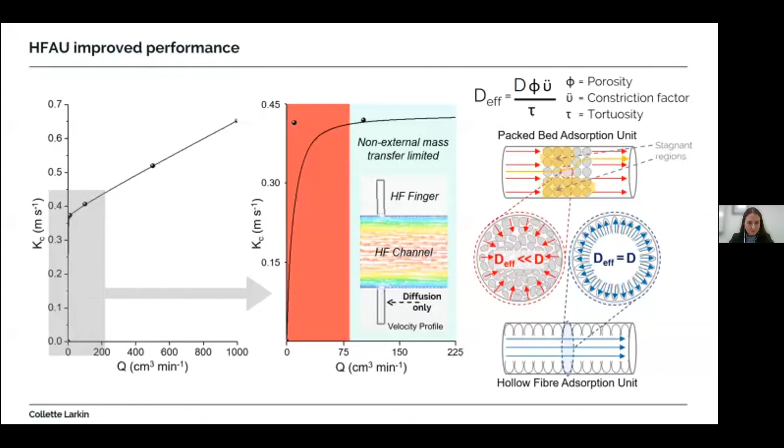To conclude, this work provides critical information to advance the design of future hollow fibre-based adsorption units: a thin coating of calcium oxide inside the fingers of the hollow fibre adsorption unit can increase the calcium oxide loading without reducing the surface area available for adsorption.

This demonstrates that the amount of CO2 adsorbent deposited can be optimized to maximize CO2 adsorption whilst reducing the size and cost of the adsorption unit.

Additionally, the optimized hollow fibre adsorption unit outperformed a packed bed adsorption unit despite the two units using an equal mass of calcium oxide. The improved CO2 capture performance of the optimized hollow fibre adsorption unit can be explained by its morphology, achieving an intensified contact between the CO2 and the calcium oxide due to the minimized mass transfer resistances and narrow residence time distribution.

The results of this work will hopefully underpin the design and development of future hollow fibre-based adsorption systems for onboard CO2 capture, and will facilitate a cleaner transition to carbon neutral fuel sources in the race to net zero.

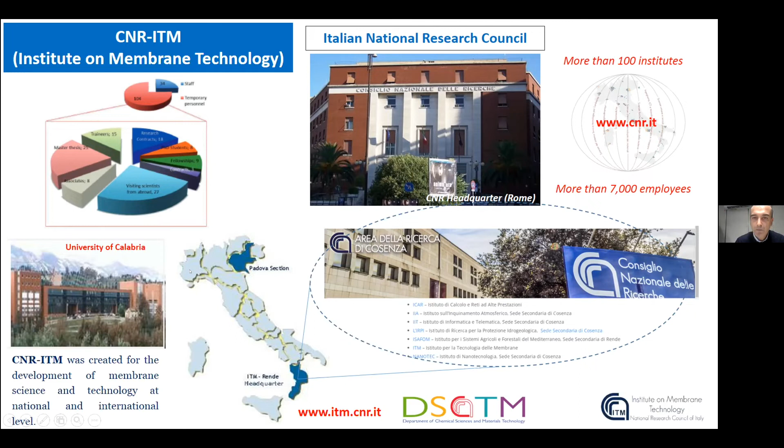Regarding my research activity, I'm involved in hydrogen generation, separation and purification by applying membrane reactor technology, particularly for producing high-grade hydrogen useful to supply high temperature and low temperature PEM fuel cells in the framework of automotive applications and by exploiting bioresources.

In this regard, this past September, the 19th to 23rd, I was the chair of the International Conference on Hydrogen Production, held under the patronage of the International Association for Hydrogen Energy. On that occasion, we discussed many typologies of hydrogen generation, because the produced hydrogen is not all the same.

In particular, gray hydrogen is the dominant hydrogen generation modality today, unfortunately, because it's related to the steam reforming process of natural gas as a fossil fuel, producing carbon monoxide and CO2 released into the environment. Then there's blue hydrogen, made using carbon capture and storage and biomass derivatives, which reduces greenhouse gases released into the atmosphere. Turquoise hydrogen is made using methane pyrolysis, producing solid carbon instead of carbon dioxide. Green hydrogen is made using the electrolysis process powered by renewable energy, without any carbon emission.

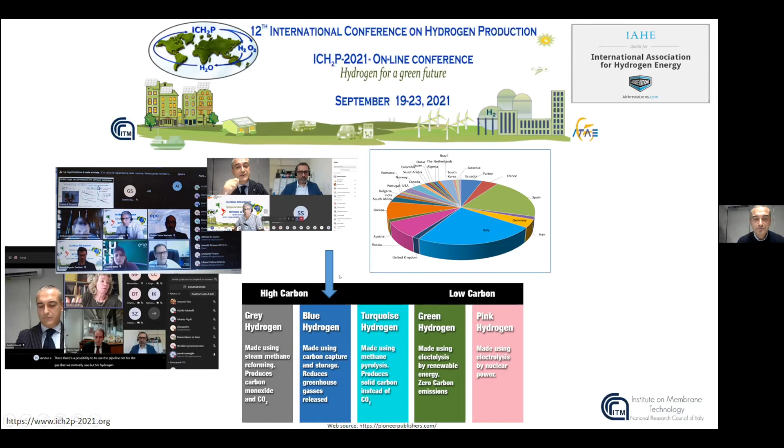I'm particularly interested in the demand for pure hydrogen because my research activity is related to the production of high-grade hydrogen through an alternative technology such as membrane reactors.

Here, I would like to show you a qualitative comparison between the gray hydrogen produced in a multi-stage conventional process with respect to an intensified hydrogen production purification membrane-based system. On the left, the conventional multi-stage process: natural gas is fed with steam in a conventional reformer operated at high temperature and high pressure, 700-900 degrees Celsius, and pressure higher than 20 bar.

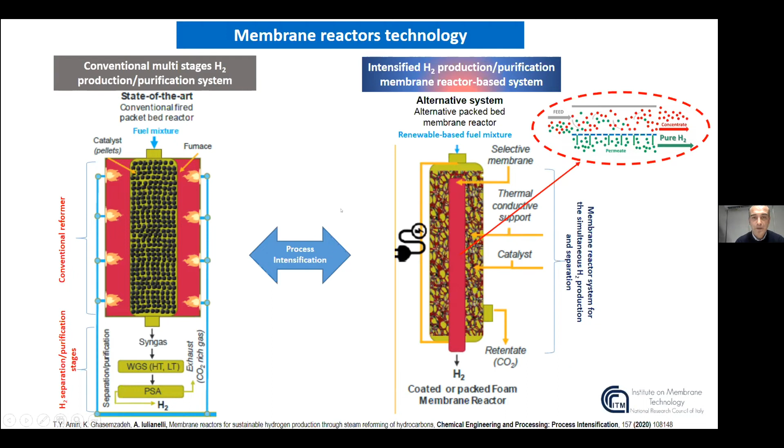Membrane reactors can be defined as an alternative technology meeting the objectives of green chemistry, engineering, and sustainability. This is because membrane reactors allow reduction of cost, since production, simultaneous separation, and purification of hydrogen are carried out in only one device, reducing the cost of several stages. They also allow reduction of waste and reduction of non-renewables used for converting natural gas into hydrogen, since it's possible to use biogas, bioethanol, or other biomass derivatives, avoiding the utilization of fossil fuels to provide the energy input to the membrane reactor system.

This is because a membrane reactor is not a closed system, and therefore is not limited by the thermodynamic equilibrium conversion. Alternatively, by reaching the same conversion as an equivalent conventional reactor, a membrane reactor can be operated at milder conditions, lower temperature and lower reaction pressure, reducing the energy inputs required for the hydrogen generation process.

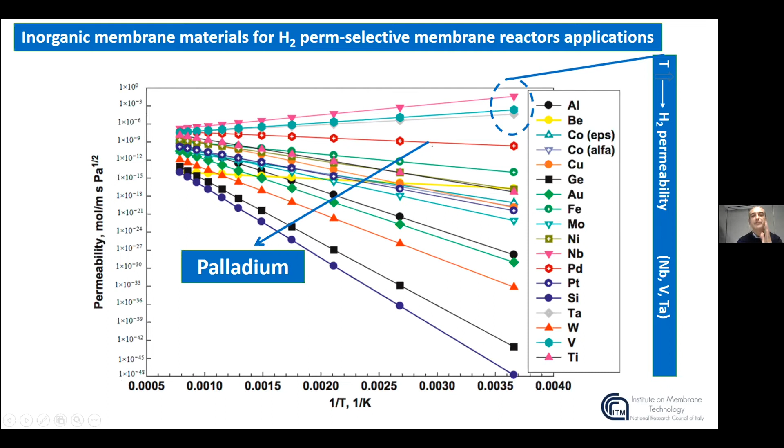Unfortunately, in this case, the permeability of hydrogen for palladium membranes increases by increasing temperature, but it is the highest at the related temperature with respect to other metals. However, also for palladium membranes, the hydrogen embrittlement phenomenon can happen.

And in this case, it happens below 300 Celsius degree and below 20 bars. Therefore, palladium can be alloyed with other metals such as silver, copper, nickel, ruthenium, gold, and so on. And the permeability of hydrogen of the alloyed palladium-based membrane can overcome also the permeability of hydrogen of the equivalent, the corresponding pure palladium membrane.

So today I would like to show you the experimental campaign related to the steam reforming reaction of a synthetic biogas stream to produce high-grade hydrogen, in this case pure hydrogen, 99.9999% of hydrogen, using a palladium, a self-supported palladium-silver membrane.

It is shown here: the tubular membrane is housed inside the membrane reactor module as reported in this schematic. And the catalyst is packed, in this case, in the lumen of the tubular membrane. Here is the picture of the bench scale setup.

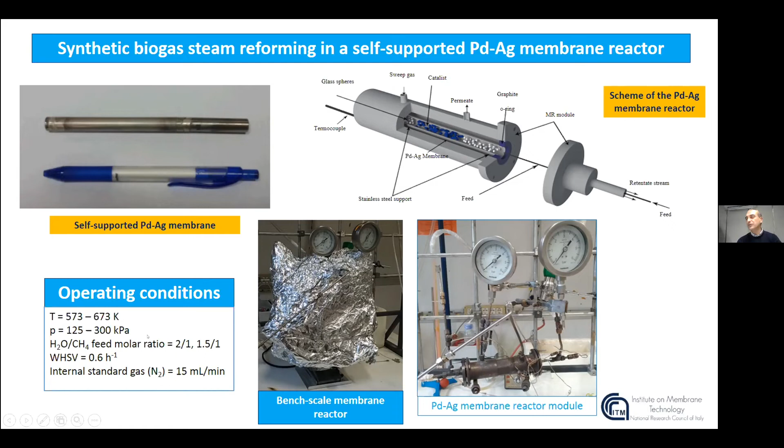And here, under operation, we use a range of temperature of 300, 400 Celsius degree and reaction pressure up to 3 bar, analyzing the steam to methane feed molar ratio equal to stoichiometric values and under defect of steam, at a constant space velocity, and using an internal standard gas procedure in order to validate the experimental results.

In general, the increase of pressure determines two opposite effects on the membrane reactor system. The positive one is related to the shift effect, because the higher the reaction pressure, the higher the hydrogen permeation driving force, since more hydrogen is forced to permeate through the membrane. More hydrogen consequently is removed from the reaction side, and the reaction is shifted towards the products with an enhanced conversion.

Furthermore, the reduction of CO2 in the feed stream in the membrane reactor was higher than 80%, reaching 90% at 2.5 bar. This is quite important for generating blue hydrogen, because we are removing part of the CO2 in the inlet stream, and then this CO2 is not released into the atmosphere.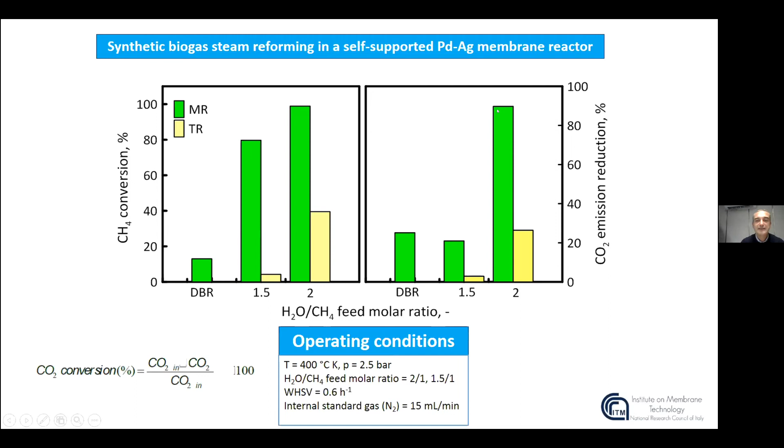By comparing the membrane reactor with the equivalent traditional reactor, it's possible to observe how the membrane reactor is always the best choice with respect to conventional reforming. In particular, under a defect of steam, the increase of pressure determines a great advantage of the membrane reactor with respect to the traditional reactor, both for conversion and CO2 emission reduction. Also in terms of hydrogen yield, the membrane reactor is a better choice by increasing the feed pressure.

In this slide, I would like to show an integrated membrane-based system to produce blue hydrogen: a membrane reformer as the first stage, in which biogas is fed combined with steam to realize a steam reforming reaction, producing high-grade hydrogen permeation through a palladium-based membrane with purity higher than 99.99%. The non-permeated stream, containing CO2, eventual unconverted methane and carbon monoxide, is then treated in a second stage process based on a biopolymeric membrane module in which CO2 is separated from methane.

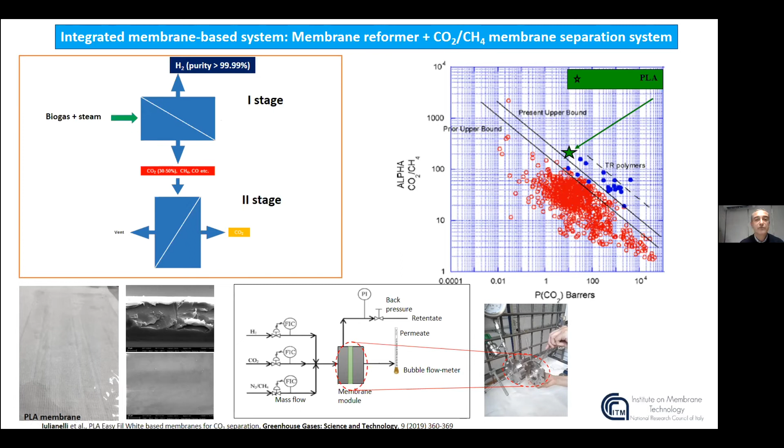In this graph, it's possible to observe our results at room temperature, in which the selectivity of CO2 versus methane is higher than 200, with respect to a permeability of CO2 through the polymeric PLA membrane higher than 10 barrer. This is just a proof of how the two-stage process based on membranes is possible and available to produce high-grade hydrogen and capture CO2, in order to meet the requirements of blue hydrogen generation.

The ongoing experimental activities related to blue hydrogen generation by biogas steam reform reaction in membrane reactors relate to the development of two different membrane systems: a bench scale palladium-gold over alumina membrane reactor, developed by Nanjing Tech University in China, which we are developing in combination with our Chinese colleagues, and as an option, a palladium and supported palladium porous stainless steel membrane realized by the University Rey Juan Carlos of Madrid in Spain. In this case the support is porous stainless steel instead of alumina, and we hope to get very good results using supported membranes as well.

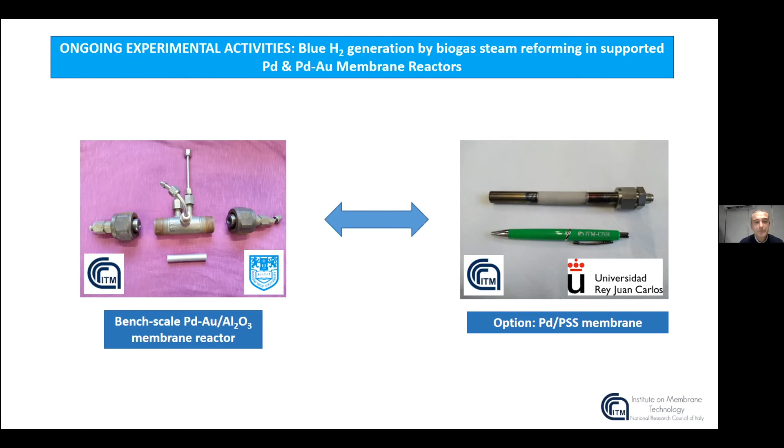The future perspective of blue hydrogen generation by exploiting biogas as a source for steam reforming reaction in membrane reactors is the integration with renewable energy systems, solar and wind, in order to provide the energy inputs required by the membrane reactor to realize the steam reforming reaction. If we meet the objective of providing this energy input from renewables, the generated hydrogen will become green hydrogen, because CO2 will be fully separated without any emission into the atmosphere, also considering the energy input required by the membrane reactor.

Has that worked? Yeah, perfect. Yeah, it's working. Brilliant. Yeah, I'm not quite used to my surname either. It used to be Scrace, and then I took my wife's surname when we got married, so I'm still getting used to Sturgeon.

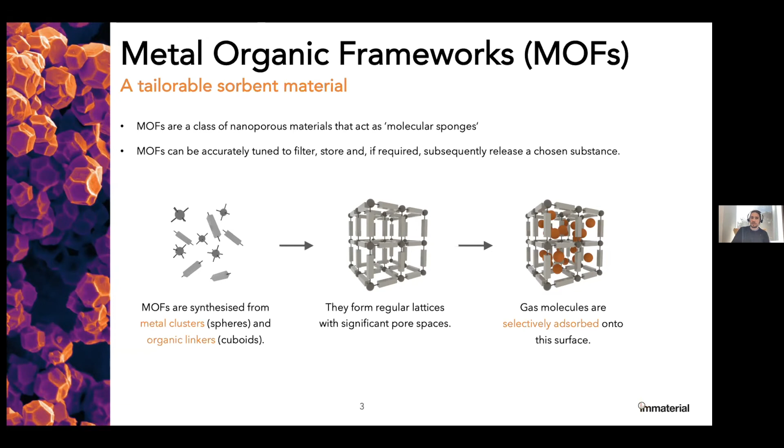One of the challenges for metal organic frameworks has been getting them into applications, because they typically form as very fine powders. Even though they've been developed for over 20 years, leading to this 100,000 structures and growing every month, the fine powders are very difficult to build into the applications that we're interested in.

So that's where Immaterial's key piece of technology comes in, this monolithic structure which I mentioned earlier. You can see some examples on the left-hand side of what our monoliths look like. A monolithic metal organic framework is really a macroscopic polycrystalline pellet, so it's all about the control of crystallization when we're producing these metal organic frameworks. We've done this now with tens of different structures, so as far as we can tell, it's applicable to any metal organic framework. We believe it works with any of the 100,000 known structures, but we obviously haven't got round to trying all of them yet.

One of the really important things about these pellets is you can get close or even all the way to the crystal density. A lot of the performance parameters reported in the literature are relative to these crystal densities. But in traditional pelletization techniques, you're often adding binder, or you need to compact them, and that can really destroy the properties of the metal organic frameworks. In contrast, this controlled crystallization process allows us to remove or tune the porosity profile and get to something which is essentially a pure crystalline pellet. That means that in real world applications, we're seeing up to 4 times the volumetric performance of the native powders.

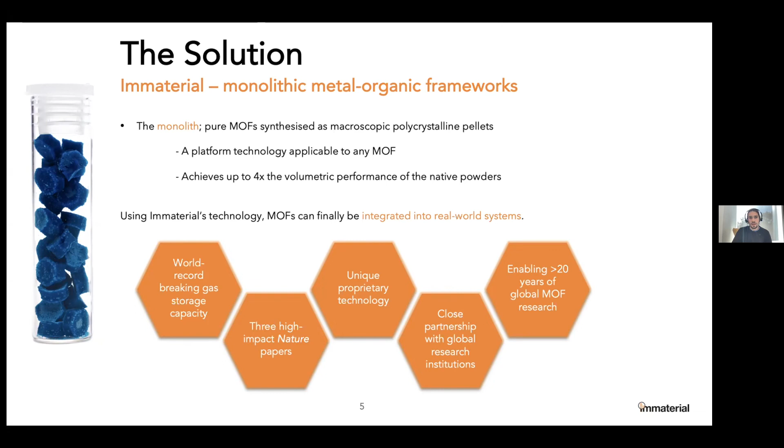So it's really this platform technology, and it's applicable in a lot of different areas. I gave you some of the broad application areas at the start, and I was going to focus in a bit more on some of our breathable air applications, specifically our NOx removal. Looking at what we've been doing with cleaning the air, the project I'm going to go into more detail on is domestic air cleaning. Here we're interested in pollutants such as ammonia, formaldehyde, and NOx.

We've also been working with the Ministry of Defense and the US Department of Defense on gas mask filters, so looking at a different set of pollutants or toxins in that case. And we're also doing quite a lot of work on cabin air filtration, so again slightly different species or pollutants are of interest in different cabins - we're looking at cars, planes, and also hopefully one day going into space.

So the main point of this slide really is to give you a flavor of the breadth of pollutants we're working with, and that relates back to the breadth of metal organic framework structures we can work with, so they can really be tuned to show exceptional performance for the target pollutant. But also, that means we might be looking at different metal organic frameworks in different air cleaning applications, but then there's a lot of synergy around filter systems and the integrability of our monolith form.

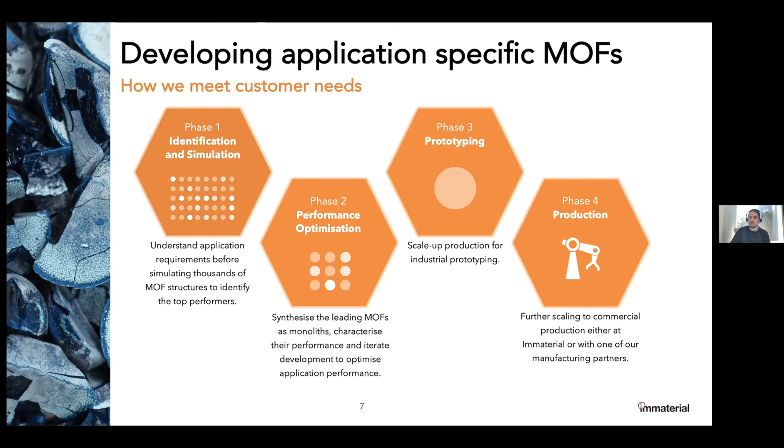We'll also look at the academic literature and everything else that's out there, and that helps identify our starting point. Once we've done those initial investigations, we really try and narrow down the number of materials we're working with, and ideally do quick iterative development on those, and really optimize the performance. So whilst we might have identified a sort of parent structure in that first phase, we'll now be looking at really tuning that structure in various ways to optimize the performance. And from there, it's a case of going into prototyping, typically with other industrial partners, and hopefully qualification and through to production.

So moving a bit more specifically onto domestic air purification, this is a recent project of work we've been focused on. In this case, we actually started by looking in the academic literature. There are a number of metal organic frameworks which have been highlighted as of particular interest for NOx removal in the academic literature. So that gave us a place to start, producing monolithic forms of some of those materials to understand how the performance reported in the academic literature translates as it goes into a monolith form.

Alongside that, we developed a test rig in-house for looking at this NOx filtration. We were working at 10 ppm, so probably a lower concentration than those typically reported in the academic literature, but much higher than ambient levels of NOx you might be concerned about. Beyond that, we're working at temperatures, pressures, and flow rates that would be typical for the sort of domestic air cleaning fans, which are the intended devices for these materials.

We looked at the impact of humidity as well, although we had to do that externally - we couldn't build that into our rig, which was really focused on this quick iterative testing. We've also worked with some of our customers, so some of those manufacturers of air cleaning fans, to verify our results versus their best available technologies. And alongside that, we've looked to identify next generation materials through simulations, and I'll share a bit of detail on that in a moment, which allows us to access structures which perhaps nobody else has ever looked at in these applications before.

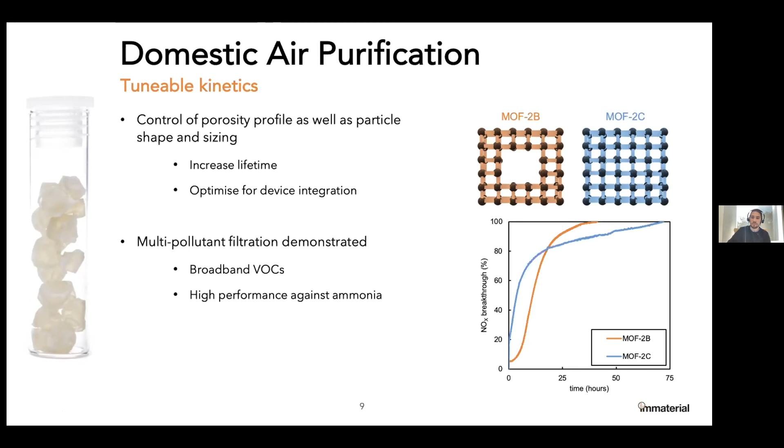Now, in parallel to this breakthrough testing, which we use to iterate on optimizing the materials, we also conducted molecular simulations in collaboration with the University of Cambridge. This is something we've done quite regularly, and it works from the Cambridge Structural Database, where these 100,000 structures of MOFs I've mentioned a few times are all held, then down selecting for those to look at hydrophobic MOFs.

We were keen for moisture in the air to not impact the performance of the structures we were going to work with, so down selecting for hydrophobicity was certainly helpful in that. Then the further down selection in matching the porosity to the pollutants we're interested in, making sure the pollutants can fit in the pore structures.

Then we add in some of the material structures we've been working with predominantly, and run grand canonical Monte Carlo simulations on that data set against these specific pollutants. As I mentioned previously, we're particularly interested in ammonia, formaldehyde, and NO2.